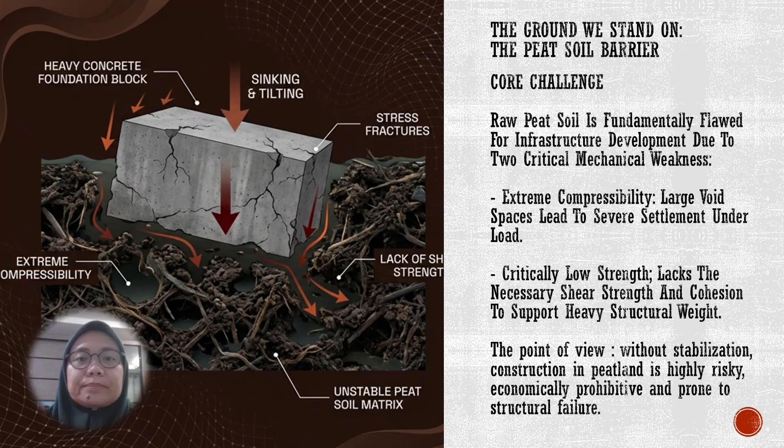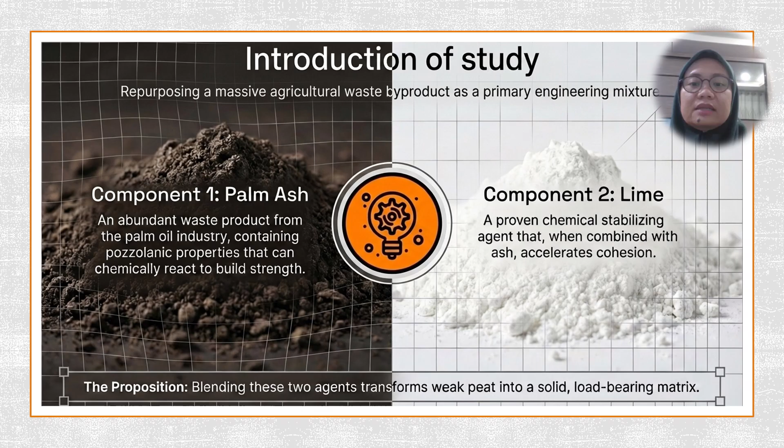This is why effective soil stabilization methods are essential. In this study, we have two main components, which are palm ash and lime. Palm ash, an abundant waste product from the palm oil industry, contains pozzolanic properties. And lime, a proven chemical stabilizing agent that, when combined with ash, accelerates cohesion.

In this study, peat soil was stabilized using a combination of palm ash, an agricultural byproduct, and lime. The goal was to improve the soil's mechanical properties while also promoting environmental sustainability. Now let's focus on the objectives of our project.

Our first objective is to compare soil strength across different mixtures of palm ash and lime. By testing various percentages, we can see how each combination affects peat soil performance. Second, we aim to identify the optimal threshold, the right percentage of palm ash and lime that truly strengthens peat soil. This helps us avoid waste and ensure effectiveness.

And finally, our third objective is to determine the ultimate ratio. In other words, the precise balance between peat soil, palm ash and lime that delivers maximum strength and stability. These three objectives form the backbone of our study. Together, they ensure that our solution is not only effective but also practical and sustainable.

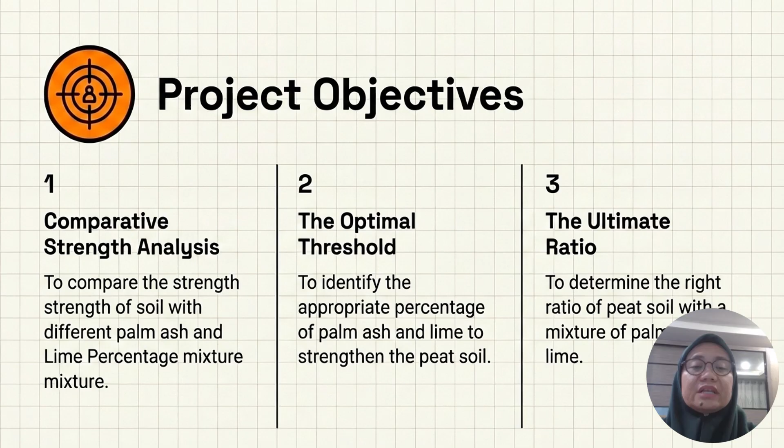This shows the methodology for this study. In this study, we have two phases. Phase 1 is the preparation of the soil sample. For step 1, the soil is mixed with the agents, which are palm ash and lime, and then the mixture will produce the soil sample.

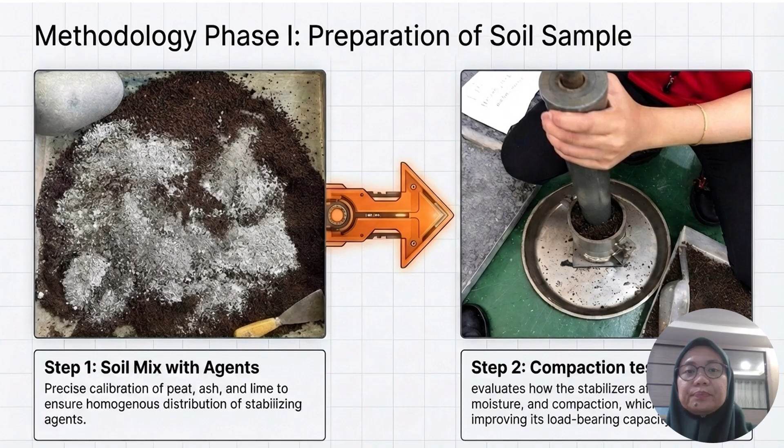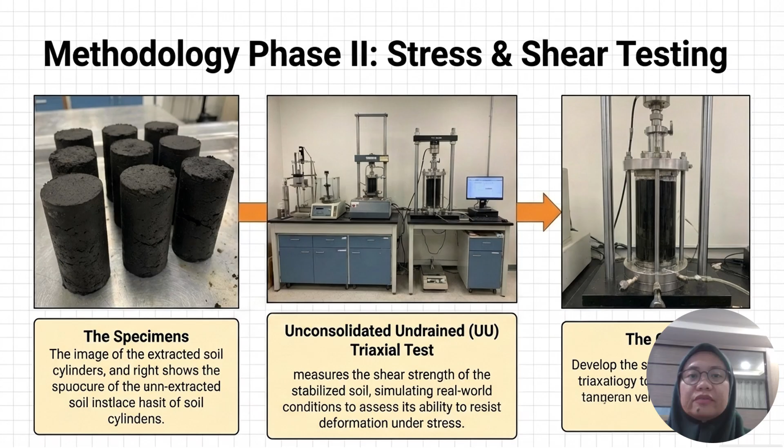The second phase is the process of testing the sample. Once the sample is ready, we will use the unconsolidated undrained, or UU, triaxial test. From this testing, we will get the value of the angle of friction and the cohesion for the sample.

As a result, we have tested three different soil compositions. Sample 1 was pure peat soil with water as a control sample. Sample 2 included 5% palm ash and 10% lime mixed with peat soil and water. Sample 3 had a higher mix, 30% palm ash and 15% lime combined with peat soil and water.

Among these, sample 3 recorded the highest shear strength. This showed that increasing the palm ash and lime content significantly improved soil stabilization. The Mohr's circle diagram confirms this result. Sample 3 showed the highest maximum shear stress. This means it has superior shear strength compared to sample 1 and sample 2.

In technical terms, the soil cohesion was measured at 30 kilopascals and a friction angle of 20 degrees. This proved that palm ash and lime together can significantly improve peat soil stability. By using palm ash, we can reduce agricultural waste while providing a cost-effective and environmentally friendly solution for soil improvement.

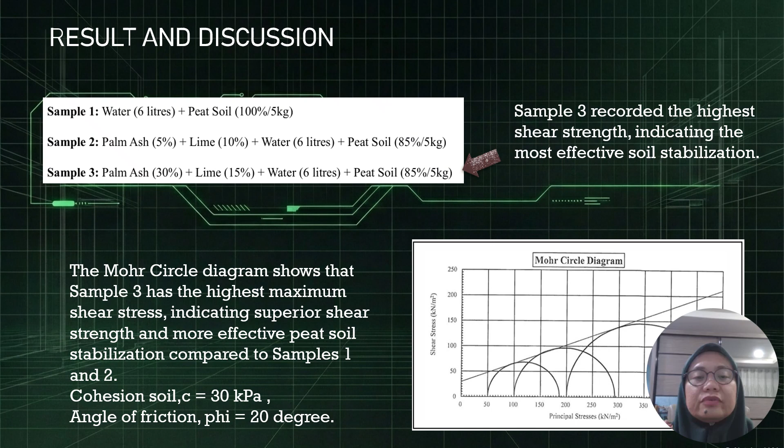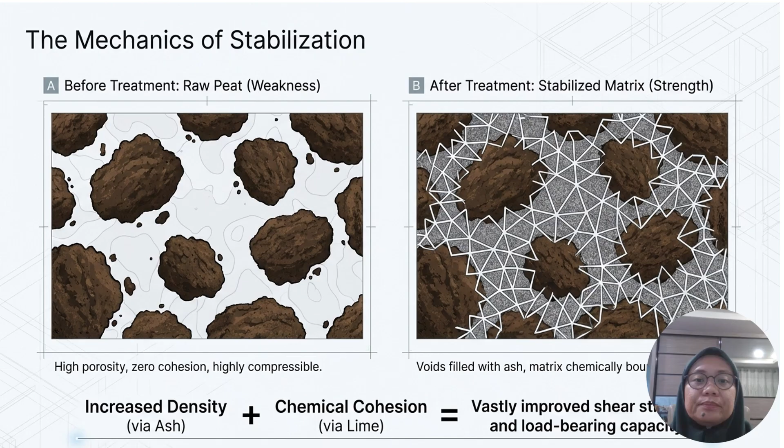This result clearly demonstrates that the combination of palm ash and lime significantly enhances peat soil strength. In conclusion, this study demonstrates how agricultural waste like palm ash combined with lime can transform weak peat soil into a strong, sustainable foundation. Our experiment showed that sample 3 achieved the highest shear strength, making it the most effective stabilization method.

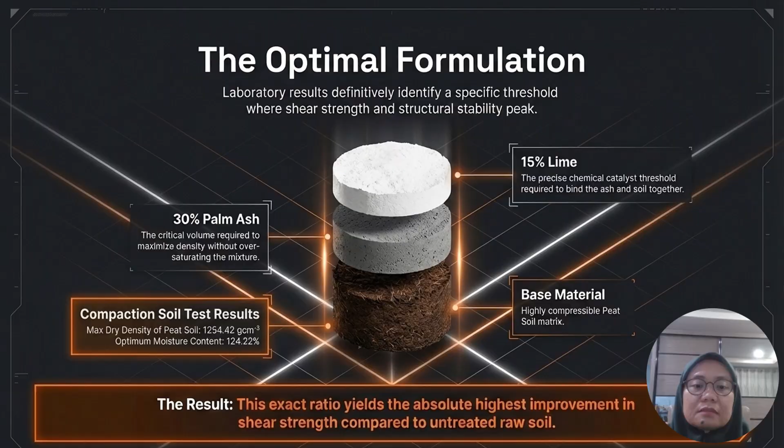In conclusion, this study showed that weak peat soil can be transformed into a stable foundation using palm ash and lime. The findings provide practical guidance for sustainable peat soil stabilization, especially in peatland regions. By converting waste into strength, we can support safer and more sustainable infrastructure development.